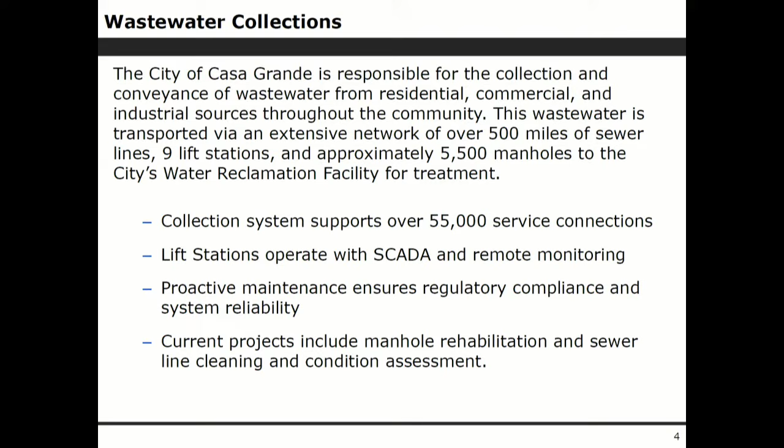Our wastewater treatment plant, as it currently lies, is 18 million gallons a day. We are just completing a conversion. We were at 12 million gallon a day capacity. We're going to be finished in the fourth quarter of this year with our expansion to 18 million gallons a day capacity. And we have a future capacity of over 50 million gallons a day at that location if we choose to continue to treat in a centralized location for Casa Grande. We do have other opportunities, and we evaluate that on an ongoing basis.

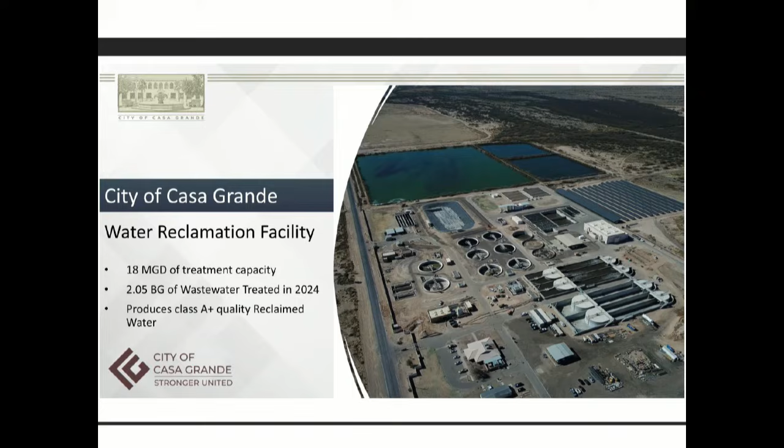In 2024, we treated over 2 billion gallons of waste that came in from our residents and our industrial users. And again, we produce that A-plus quality effluent.

We have 12 certified operators through the Arizona Department of Environmental Quality that work at our plant. 2 of those are grade 4, which is the highest grade that you can get for certifications. And if anybody knows anything about the wastewater industry, finding talented people is very difficult, so we have to really grow from within. So when our maintenance workers come on board, you can see how many of them have their grade 1 certifications, and then 2, and then 3, and then ultimately 4.

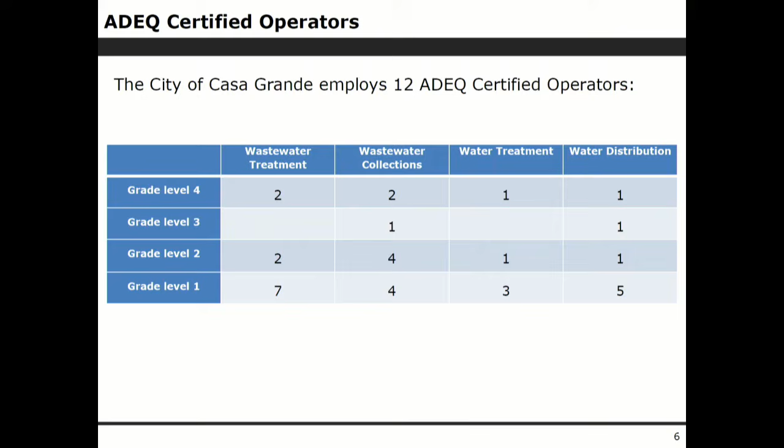So if kids ever thought about what they want to do for a living, if they can get over the stigmatism of wastewater, it's a great place to be able to grow your career very quickly if you can get through that certification program. And when we go out to the schools, we try to promote that as much as we can, but it's difficult to find certified operators. We're very, very fortunate to have the level of operators that we have in Casa Grande.

And then our treatment process. So our preliminary treatment is basically to get any of the difficult debris out of that waste stream. If you have a swimming pool and you picture a rock going into your filter, you can imagine what that's going to do to your impeller. So now you have to imagine all the waste that anybody can send to us, what that can do to our systems that we have in our wastewater treatment plants. So that first thing is to screen that debris out so that we do not have to treat it and it doesn't impact our pumps in a negative way.

And then our secondary treatment is our biological treatment process, and those are our aeration or oxidation ditches. That's where we introduce our microenvironment that we've created, basically our bugs that digest all the nutrients in our waste stream. If you've ever seen our aeration ditches, when I give the tours to the kids or the folks that come out to our wastewater plant, it's like Willy Wonka's chocolate factory river. So that is the process that we do, but that's where the bugs work, and we start to digest that waste and get it to a place where we can then treat it through the rest of the process.

Our next process is our clarifiers, and that's where we separate the liquids from the solids. Effluent is the liquid portion of that waste stream. The solids go in their direction, and I'll talk a little bit about how we process those in just a bit. But then those liquids are what turns into our treated effluent.

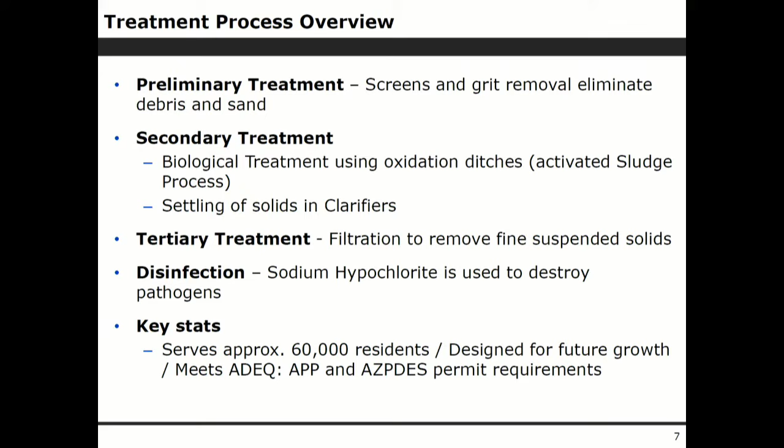Kevin, can I ask a quick question? Absolutely.

How often does the state come and do inspections? Don't they monitor your operation on some kind of a regular basis?

The best way I can answer that is whenever they want. But we do have regularly scheduled inspections where they come out and look at our daily reports and things like that. They can come out anytime they want and take a look at our process, and we encourage them to come out. We like to think we're the flagship of wastewater treatment. I'm sure there are better plants out there in the world, but we do a really good job of maintaining our plant and ensuring that we are right where we need to be for regulatory compliance. Yes, heavily inspected and heavily regulated. Probably too much, but we really don't have that choice.

This diagram just gives a line graph of our different treatment processes. The upper process is the liquids, where we go through that secondary clarifier, which separates those liquids from the solids. We go through that filtration process, then into the chlorination or disinfection basin, then we dechlorinate, and then we discharge. Our solids go through a similar process where we further digest that waste to a point where there's nothing that's going to impact the environment when we get rid of those solids.

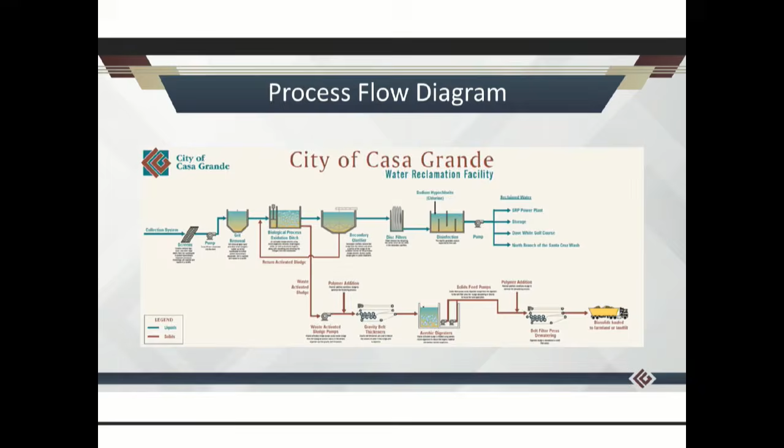Yes, very much so, we introduce air to that system. It helps break it down and get rid of the nutrients that are negatively impactful on the environment. Once we get to a point and we test and meet those requirements, then we're able to use it at our landfill. There are also a lot of other ways you can use that solids material — you can land apply it for fertilizer and things like that, but we currently don't do that. As you said, from a digester, it comes out as just plain dirt that really doesn't have anything. They use it for bedding for the cattle and all this stuff, but it really isn't good for topsoil because everything's been removed from it. Correct, it's pretty inert at that point.

Our Phase 4A expansion, which will be finished in the fourth quarter of this year, cost just over $32 million and takes us from 12 million gallons a day to 18 million gallons a day. We've also expanded our solids handling capability with this step and improved our odor control. Our Phase 4B, which is under design right now, is where we'll be introducing UV disinfection to our process, as well as putting odor control throughout our entire plant. We're really trying to create redundancy in the process and replace some of our older equipment so that we're more modernized and ready for that next growth spurt whenever that happens — but it sure hasn't slowed down lately. We're continuing to grow in Casa Grande.

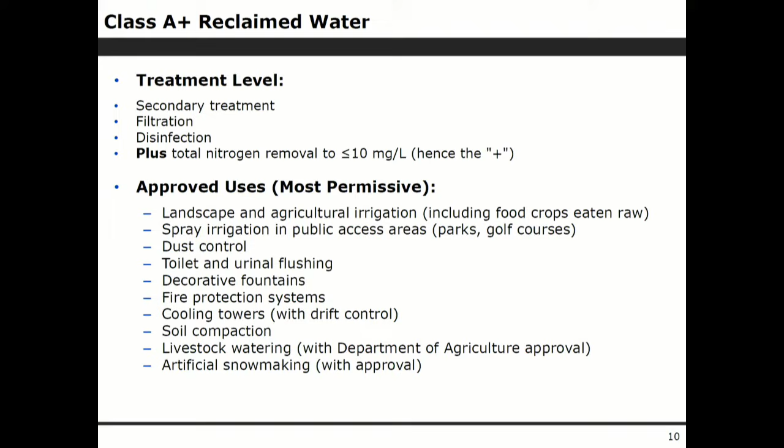We also send it to SRP's Desert Basin power generation plant, where they use it in their cooling towers. Most of our effluent gets discharged to the north branch of the Santa Cruz, which is what's called our managed recharge facility. There are two types of recharge facilities: a managed recharge facility takes advantage of a natural waterway to discharge your effluent into, allowing that to percolate into the ground and receive further beneficial treatment through the ground process.

We have a 5.8 mile long managed facility in the north branch of the Santa Cruz, and I'll show you a picture of that here in just a second.

We're able to recharge 3,500 acre-feet of water each year, but we don't achieve that today because anytime it rains and water is introduced into that system, we get zero credit for what we discharge. Anytime we have a monsoon, or in some cases the San Carlos Irrigation District has points along their distribution system where they discharge water into the north branch of the Santa Cruz, we get zero credit for that. So we have the capability of recharging 3,500 acre-feet, but we don't achieve it because of other influences.

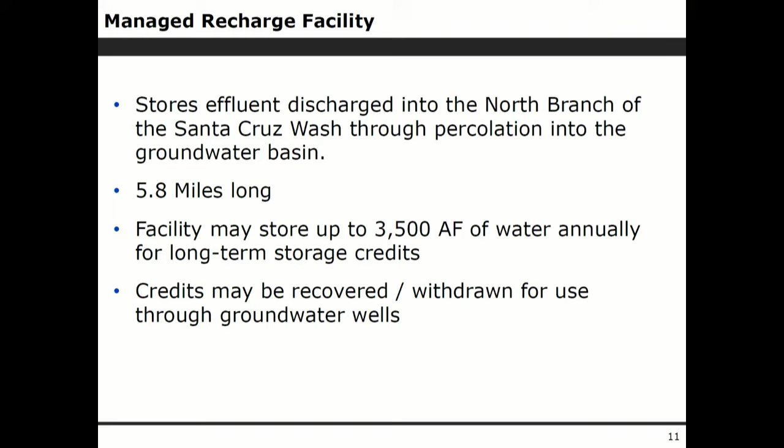Yeah, sure, go ahead. I'm sorry, Kevin.

When you backed up two slides, you're saying where you pump it to the golf course, to the toilets, to all this, so you have to have a separate line running into those places. I'm looking at fire protection systems. My home is covered, I have fire sprinklers in my house, which flooded one day - it was real fun, but a whole other problem. But that comes just from the main line.

So how do you, if you had fire protection systems in, say, industrial parks, would you have a separate line running to that industrial park? So then would building code in the city have the provision to say this industrial park or this area has to have a separate line for effluent water to service all these areas?

Yeah, I think it's commonly called purple pipe. We don't have it as a city code, but we have the system in place.

We just finished about an 8-mile long effluent delivery line into our industrial area. It's also an opportunity for us to have an alternative discharge point in the main branch of the Santa Cruz, but that line was developed to deliver effluent to our industrial users, and it is in place today.

We're currently upgrading our effluent pumps to feed that system, and we're negotiating with some of our industries so they can take advantage of using that treated effluent for cooling towers, fire protection, or any other permitted use. That way it doesn't impact the potable water use of those industries and really helps with the drinking water situation in our area.

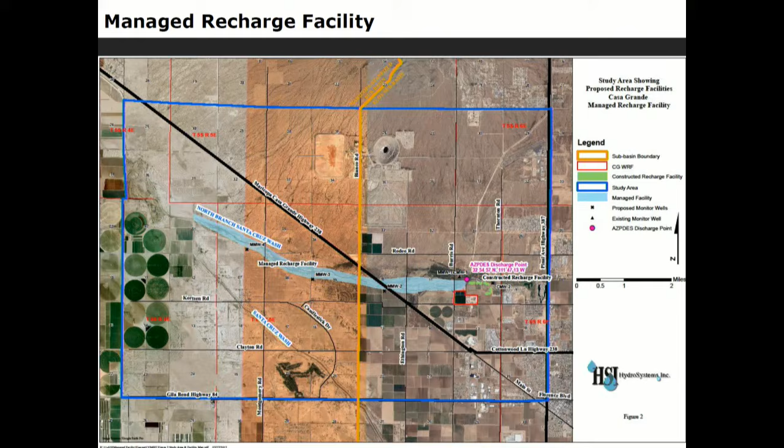Soil aquifer treatment is basically what happens when it rains, or when we discharge our effluent, or any water hits the ground. That water is absorbed and goes through a beneficial treatment by the natural environment. Even though we've treated our effluent to a point safe to discharge, as it percolates through that system, it gets cleaner as it goes deeper through the ground. That's how it's worked forever, and that's how it's going to continue to work.

But we take great pride in meeting our permit requirements. We don't have to treat to an A+ standard. We do that for a reason, because we want to take advantage of every drop of water, especially here in Arizona where water is gold, and it is the future, and we need to maintain that resource.

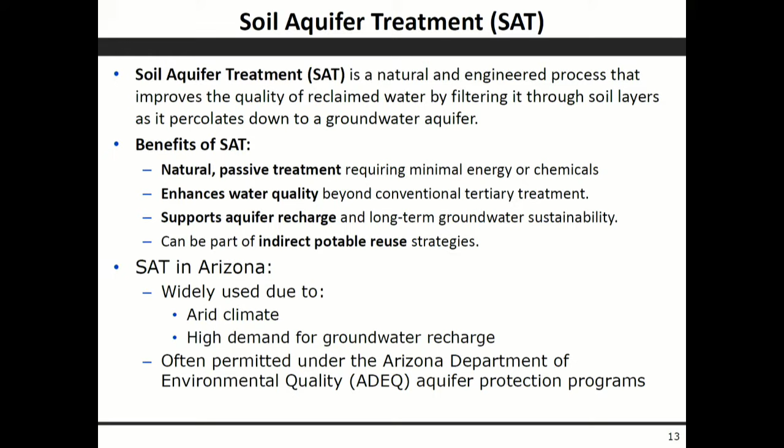So that's the end of my presentation. Happy to answer any additional questions. Any questions for Kevin? Steve.

Yes, Jeff. On one of your charts there, and the purpose of this whole meeting is to put people at ease, it said it could be used for watering livestock with USDA approval. Explain how that would happen, because I know with effluent that goes into like an urban lake, is it really safe, but it's safe for animals?

Yeah, and actually the one up there includes irrigating food crops that can be eaten raw. So each of those reuses have to be permitted, and each one is reviewed. So if a farmer wanted to use that for agricultural use, we would go through a permit process to get that approved. They would have to have a permit, we have to have a permit to deliver. So it's all looked at every time we make any changes to how we use that effluent.

So if you have a backyard garden and you have heads of lettuce and you spray it on the lettuce, it would technically be safe to eat still.

Yeah, I'm not going to sit up here and drink a glass of treated effluent just because I know how great Arizona Water treats their water. I would prefer to drink theirs than that, but it is totally safe.

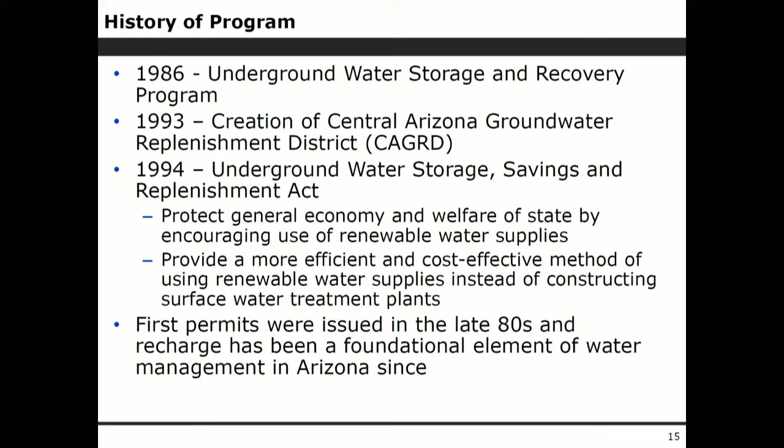Before I talk too much about the program, I just want to give you a feel for the complicated nature of groundwater in Pinal County. Some people think of Pinal County as being entirely encompassed within the Pinal AMA, but that is not the case.

The state of Arizona is divided into 50 groundwater basins. Some are called active management areas because that's where we have higher levels of regulation, and outside those AMAs there are lower levels of regulation. As you can see from this slide, there are 3 active management areas inside Pinal County, and there are areas outside those active management areas.

Arizona Water Company serves 3 primary water systems within Pinal County. There's what we call the Superstition system, which includes Apache Junction, Gold Canyon, and Superior. Down in the southeast, we have our Falcon Valley water system, which includes Saddlebrook Ranch, Oracle, and San Manuel.

And then what we consider to be our primary and largest water system is the Pinal Valley water system. That includes a number of water systems within it, and it serves the Stanfield area, Arizona City, Casa Grande, and Coolidge. So it might look easy to understand at the moment, but if we go to the next slide, this is actually a picture of those groundwater basins themselves.

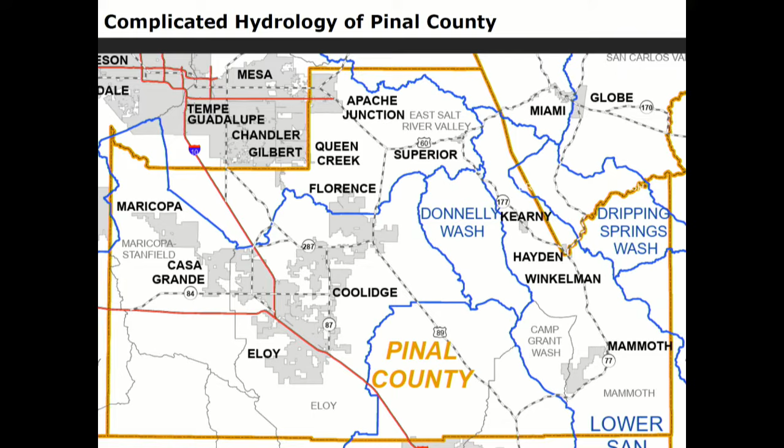In addition to the active management areas, there are several smaller basins outside the active management areas located in Pinal, including Donnelly Wash, the Lower San Pedro, Dripping Springs, and also the Salt River. So there are 7 groundwater basins within Pinal County, which makes for a more interesting water management picture.

But let's talk about what groundwater recharge is. Groundwater recharge refers to the replenishment—using that in the more common sense, not as in replenishment done by the CAGRD—but as the replenishment of a groundwater aquifer through natural, incidental, or artificial means. Natural is when it rains or snows, and that water percolates into the ground, finds its way to rivers and streams, and ultimately to the aquifer. That's natural recharge, it happens every day. Kevin was referring to that in his presentation.

Incidental recharge is when a water user, like a municipal, industrial, or agricultural user, uses water and a portion of that water goes unused and finds its way to the aquifer. An example might be growing crops: you apply a water supply, some of that water is used consumptively by the crops, but the remainder goes to the aquifer.

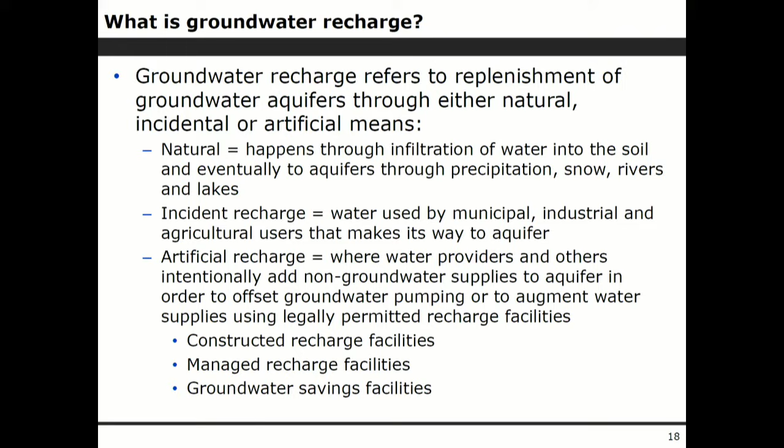The final way to replenish the aquifer is through artificial recharge, where a water provider or others intentionally add a non-groundwater supply to the aquifer in order to offset groundwater pumping and augment water supplies for the future. They do that through legally permitted recharge facilities. Kevin mentioned that the city of Casa Grande has a managed recharge facility, which is one type of facility, and I'm going to talk more about some of those in a minute.

But let's talk about replenishment for a minute. Replenishment is the function of replacing groundwater pumping considered to be in excess of sustainable levels. It is conducted through artificial recharge facilities that are legally permitted—again, the same facilities, and we'll talk about those shortly.

The difference between replenishment and recharge is that replenishment happens after the groundwater pumping has occurred. The other difference is that the responsibility of replenishment currently lies solely with the Central Arizona Groundwater Replenishment District—no other entity has that responsibility. Everyone else would be recharging it, which is something you'd do in advance of recovering those credits.

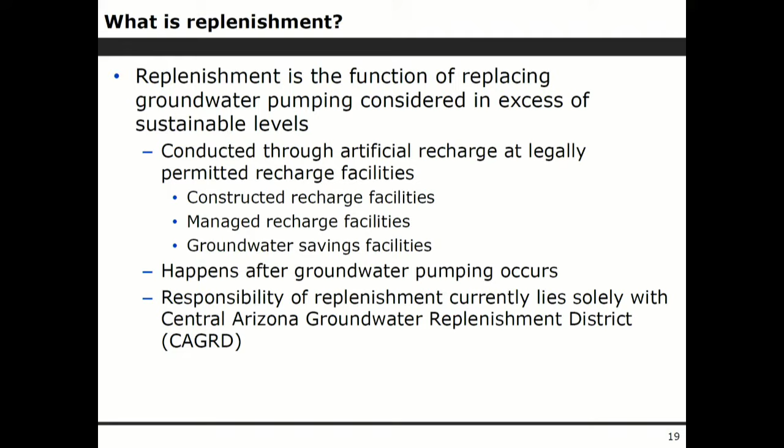The legal sources of water for recharge or for replenishment. Basically, it's any water supply that is not a groundwater supply. In Arizona, we're typically looking at Central Arizona Project water, CAP water, Colorado River water, surface water like Gila River water or water from Queen Creek, and effluent.

Effluent is the only supply that requires an aquifer protection permit, which is an additional level of regulation that Kevin referred to. On the right, you can see two constructed recharge facilities, both located inside Pinal County. One is the Superstition Mountains Recharge Project, located in the Phoenix Active Management Area, owned and operated by CAP. The one below is the Pinal Valley Recharge and Recovery Project, located in the Pinal AMA, owned and operated by Arizona Water Company.

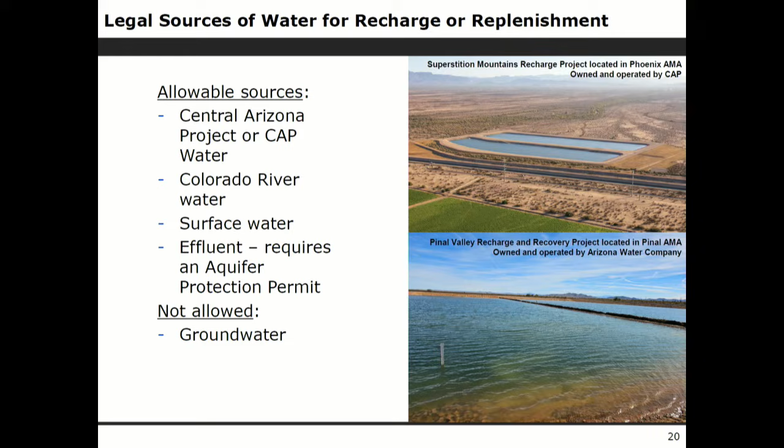So let's talk about the different types of permits. I mentioned earlier that the program was revamped in 1994. When that was done, all of these different permits were created, so you cannot operate a recharge project in Arizona without these permits in place. You need an underground storage facility permit, or a groundwater savings facility permit, depending on the type of facility you want to operate. So you have to have a facility permit.

There are two types of underground storage facility permits, a constructed facility and a managed facility. Casa Grande's facility is a managed facility. Of the 12 constructed facilities in the Pinal AMA, 2 store CAP water and 10 store effluent. Of the managed facilities, there are 3 in the Pinal AMA, 1 stores CAP water, and 2 store effluent. There are also groundwater savings facility permits, and I'll talk more about how those processes work in a moment. There are 4 in the Pinal AMA, 3 store CAP water, and 1 stores effluent.

Anyone can store water at a legally permitted storage facility in Arizona, but they are required to acquire a water storage permit. Whether or not you own the facility is irrelevant—even if you own the facility, you have to have a water storage permit. There are 50 such permits in the Pinal AMA, and whether you're going to store or recover that water in a single year, or store it long term for future shortage, you still have to have that permit.

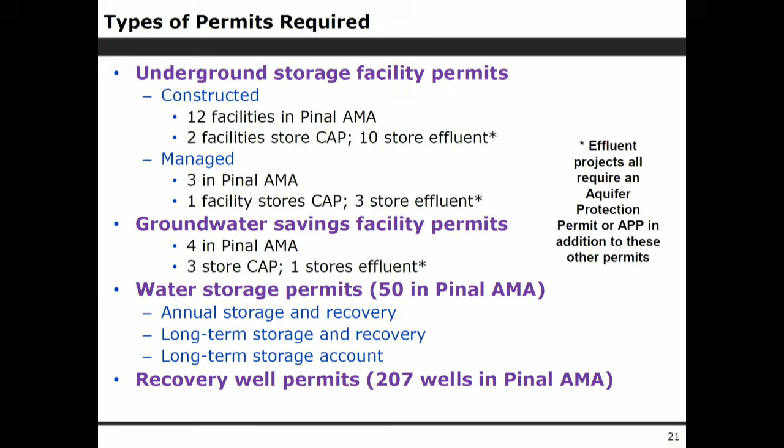Real quick question, Ms. Chair. So we were talking about the two projects—one was holding water, the two ponds you were showing on the side, those recharge ponds. How do they recharge? Is that percolation? Yes, these just percolate.

So what happens is, and by the way, I wanted to mention I brought my recharge hydrologist with me, Mr. Dick Thompson, and this is his encore career. He is our recharge hydrologist. He spent most of his time with the city of Tucson operating their recharge program, which is quite extensive. So those are, I'm sorry to back up on you like this, but they're pretty large projects. How long does it take that water to get there—how deep is the water table?

How long does it take the water to get there? How long does it take those ponds—how often are they recharged? Are you maintaining a constant level? Are you having to pump it? I'm just curious, because of evaporation and the fact that it doesn't really go too far into the ground.

Yeah, so it depends on the facility. Since we have direct knowledge of the Pinal Valley Recharge and Recovery Facility, I would ask Dick to come up and give a brief answer, because he keeps track of this all the time, so he knows exactly how long it takes to get to the surface. I'm just curious. Thank you—I went to the ribbon cutting of that facility the day they turned water into it the first time. Anyway, cool. Go ahead.

So I'm curious, since this is a recharge pond - it's percolating at a certain rate, the water level goes down, and some more water comes in. How do you balance that? Maybe that's kind of an open question.

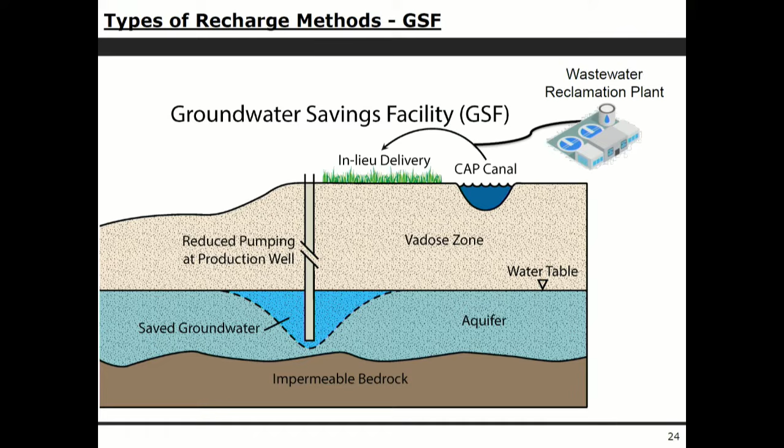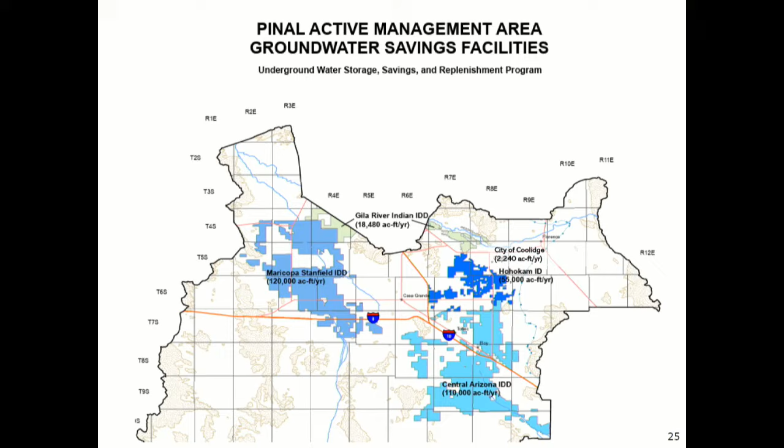This is the location of the groundwater savings facilities in the Pinal AMA. I'll just add that no one type of facility is better than another - these are just two different methods, and depending on your situation, one facility might work better, or a combination of facilities. Let's talk for a few minutes about how much this tool is being used. I mentioned back in the 80s and 90s when we passed that program - we've been storing water in the ground for a long time.

This graphic represents all the water that's been stored in the active management areas since the inception of the program. That's 13.36 million acre feet, over 4 trillion gallons. To give you perspective, Arizona Water Company today uses about 20,000 acre feet a year of water. This would be a supply that would last us 668 years.

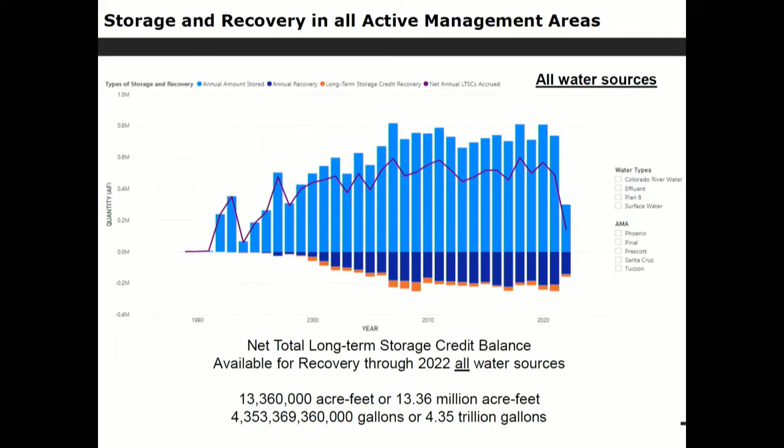Now let's take a look at effluent. Again, this is all effluent that's been stored in all of the active management areas since the inception of the program. 1.45 million acre feet of effluent has been stored, that's about 472 billion gallons. That is roughly 11% of all the water that's been stored since the inception of the program, and that's in all the AMAs.

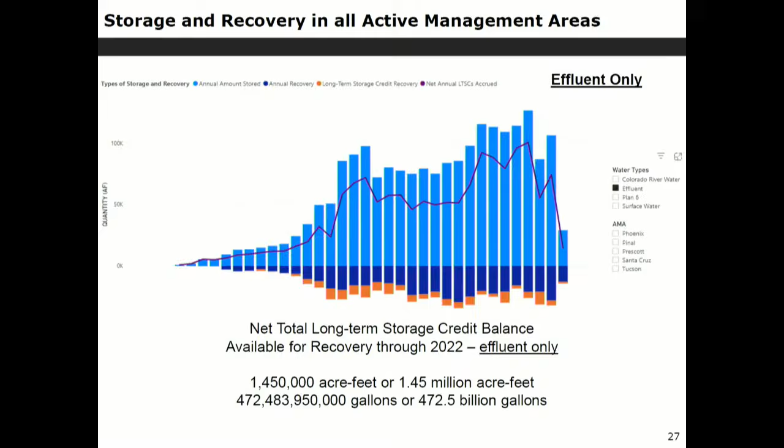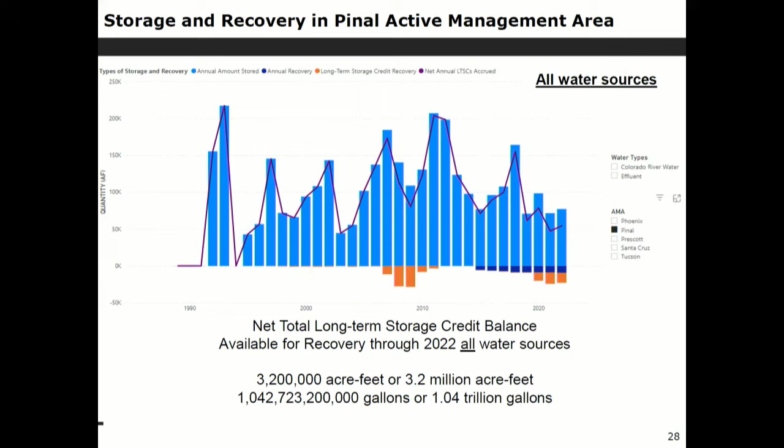Now let's take a quick look at what's going on in Pinal. By the way, this data is through 2022, so 2023 and 2024 are not included. In the Pinal AMA, of all the water sources, there's been about 3.2 million acre feet of water stored. That's about 1 trillion gallons, and that's all water sources. Of effluent, there's been about 27,350 acre feet, or 8.9 billion gallons. That is not even 1% of the total water that's been stored in the Pinal AMA. So storage in the Pinal AMA has by far been through CAP water.

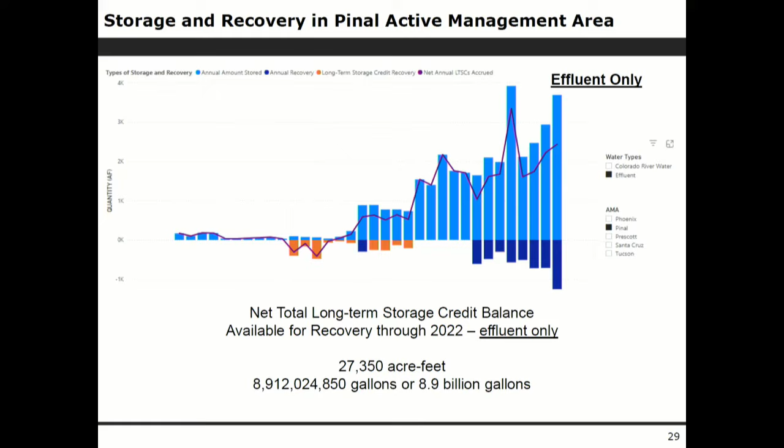So let me talk a little bit about our recharge program. We consider recharge to be an extremely important part of our water management strategy. We are currently storing at 3 groundwater savings facilities. We've been doing this since 2015, and those facilities are those 3 irrigation districts we're all familiar with. We own and operate the Pinal Valley Recharge and Recovery Facility. We've been operating it since 2020, and Mr. Thompson is our recharge hydrologist, and he's very good at what he does.

Going forward, if we become a sewer provider in the Pinal AMA, we will absolutely include effluent storage and recovery. We own and operate 24 recovery wells that we use to pull that water out of the ground each year.

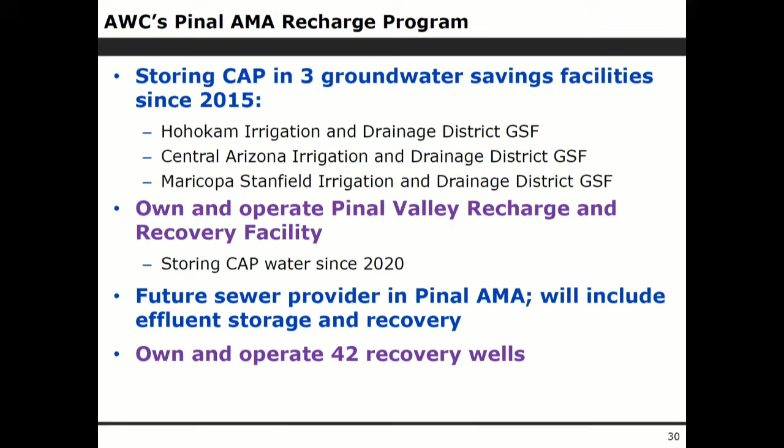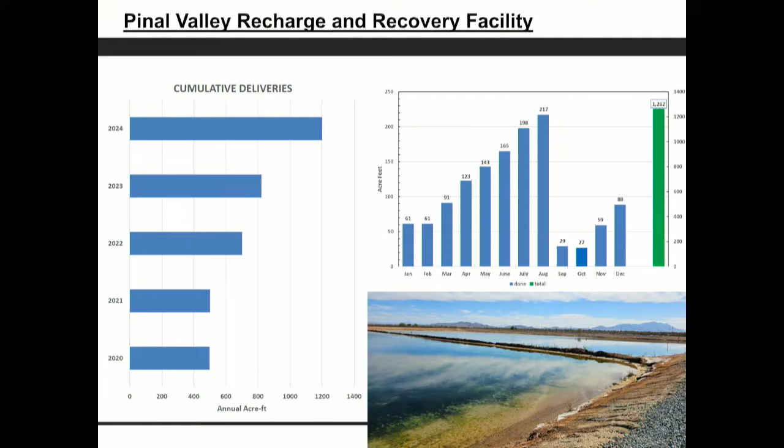Last, I want to talk about our water resource strategy and how some of this stuff all fits together. At Arizona Water Company, we have two water resource strategies: one is to secure and maintain a diverse water supply portfolio, and two is to promote the efficient use of all the water supplies that we have. I'm going to start with the second one first because I'll talk more in depth about the first one.

When I say we promote the efficient use of all water supplies, I mean every single person, every single entity, including Arizona Water Company, the city, the county, we all are going to use our water efficiently. It doesn't matter whether the customer arrived 100 years ago or isn't going to arrive here for 10 years. Anybody who lives here is going to use their water supply efficiently, and it doesn't matter the type of use—a golf course, a home, a cow, landscape watering, Lucid Motors, or the Wendy's. Everyone is going to use water efficiently.

And it doesn't matter the supply source. We don't care if it's CAP water, effluent, or groundwater—in fact, those supplies are all commingled together. We live in a desert, so we're going to use every drop of water we have as efficiently as possible. That's one piece of it. We also look at water efficiency as a type of water supply: if we use our water efficiently, then we will not have to go out and acquire as much water as we would otherwise have to.

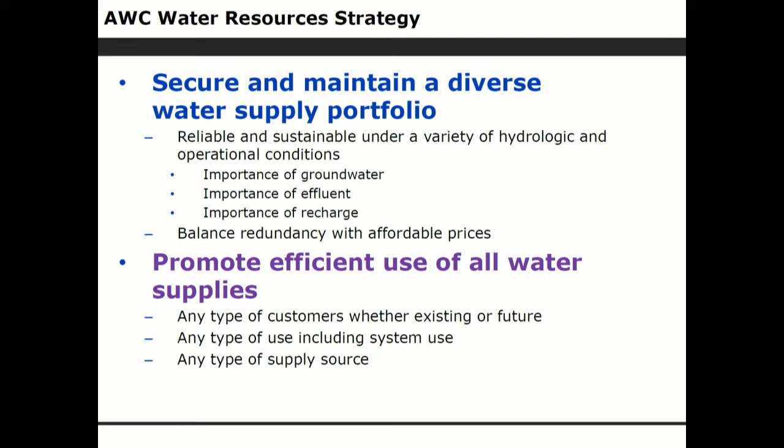One day I hope to have Social Security, and that's going to come in every single month—that's like a renewable water supply. Maybe I have an annuity somewhere, maybe a pension—those are going to come in on a monthly basis.

I need to manage my groundwater supply, I need to manage my 401k to last throughout my life. I do that by using my renewable supplies, and then maybe I go out and get a job and recharge my account, put a little more money in it—maybe get a part-time gig, something like that.

If you look at the way you manage your water portfolio, that's essentially the same way we manage our water supply. I'm going to stop there, because my job is to pass the mantle off to David Dunaway, who's going to describe, once the water's recovered, what he does to make sure it meets drinking water standards.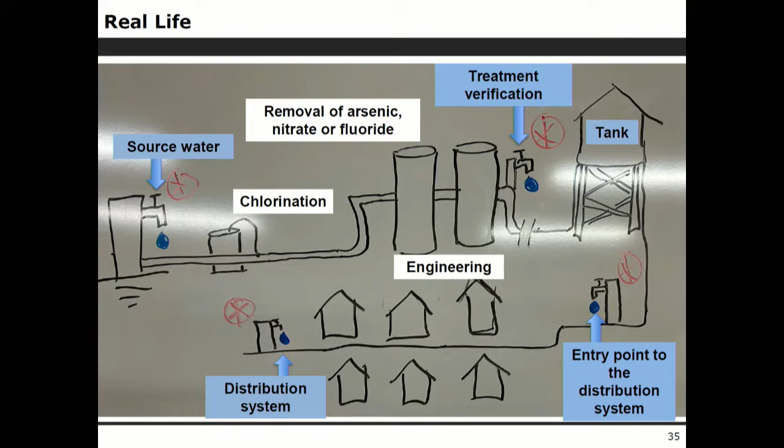Once every 3 years, the friendly folks at ADEQ do pay us a visit. I can echo Kevin's sentiment that they show up as frequently as they like, but no less than once every 3 years.

And when I was talking about sampling in a number of locations, oh boy, there's a lot of sampling. The state and federal government in the Pinal Valley system every year would like us to take 938 samples, and that's a lot just by itself. But we don't stop there. At Arizona Water Company, we're taking over 3 times the number of operational samples that we hold ourselves to, to make sure that we are serving safe drinking water above and beyond what the government wants us to.

And in a case, as you can see, where there's a 0 for treatment verification and a 0 for tank samples, despite thousands of pages of regulation, we're taking samples in places the government didn't really ask us to, just to make sure the water is safe and we understand it from start to finish.

Before I started at Arizona Water Company, and what sold me on working here, despite a claim of job hopping, was it was described as compliance is not an option. It's a drop-dead requirement. As a former regulator, somebody who's worked in water a long time, that was music to my ears. After decades of working in water and public health, like I was saying, there's just compliance down here, and then there's where we are.

Now, these water samples are sent to state-certified labs, again, with their own body of regulation. We are very lucky in Arizona to have really good ones here. But even then, for a handful of the really complicated tests with stuff I don't want to pronounce in a public venue, we have to ship those samples out to California and Ohio because there are so few specialized equipment needed to detect down to these super, super tiny levels that we need to for compliance or above compliance in our case.

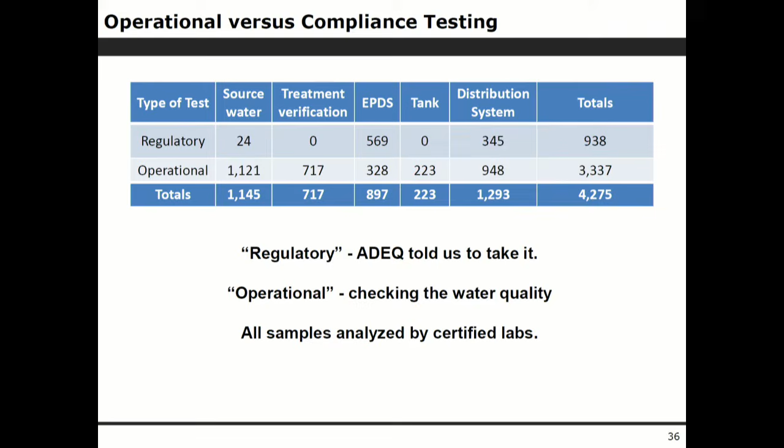But who takes those samples and who runs those plants? Trained and certified experts. Out of 295 Arizona Water employees overall, all of our systems, our support staff, just about half of us, 135, hold at least one level of certification. 34 of us in Pinal Valley are certified operators, again, about half of our 70-plus staff.

Now, in drinking water, there's 2 kinds of certified operators. You hold one license to operate the treatment plants, and you hold another license to operate the distribution systems. There's 4 grades in each class. The first one is the first step. Grade 4 is the pinnacle of your career. And so the table there gives the breakdown of certified operators and their level, both for Arizona Water Company and Pinal Valley. Something very interesting, you tend to have the most either at the begin or the end of your career. We've got the most first level grades or the 4th level grades. Folks tend to stay at Arizona Water Company a long time and progress through their career. So you'll see a distribution where you've got more at either end. The data nerd in me really enjoys that.

Legally speaking, though, you technically only need 2 certified operators, one that holds certifications at the grade of your water system and your distribution system, and one more as a backup. We have many, many more than that.

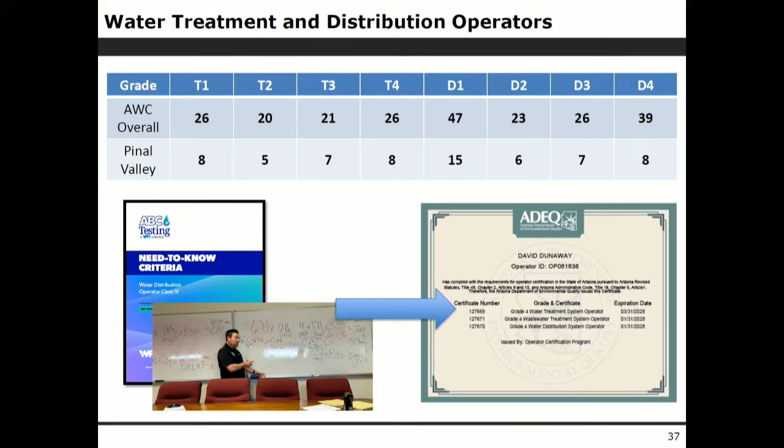Why do we need this level of expertise? As you can see on the screen, water is so much more complicated than just turning on a tap. The top photo is one of Pinal Valley's nitrate removal plants north of Mission Royale. Kind of hard to make out, but each one of those 5 treatment vessels has a myriad of valves, actuators, electrical panels, ways of bringing water in, taking water out, putting it to backwash, putting it for disposal. And that's a lot of stuff that people have to keep track of.

More of a zoomed-in photo on the bottom is a pilot test we recently conducted in Coolidge to better remove fluoride. Despite being in a Connex box and about 130 degrees, there's over a dozen input panels, 9 sampling ports, multiple chemical pumps, and 1 very loud air relief valve. Simply stated, treating and delivering safe water so that our customers can turn on the tap is a very detailed and complex process.

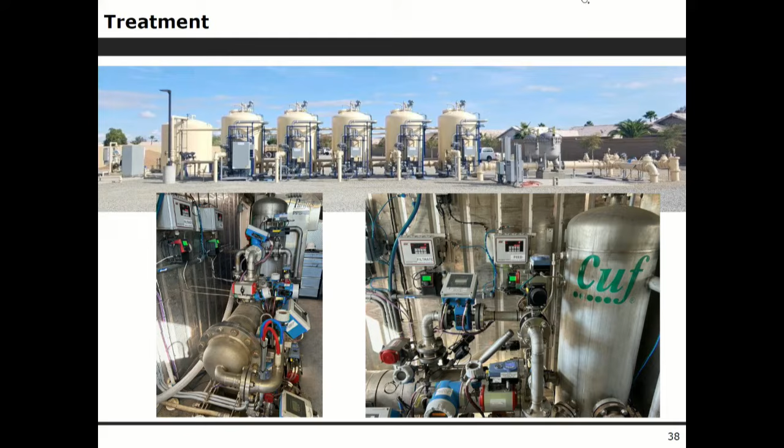But I encourage you not to just take my word for it. All water systems are required to publish a consumer confidence report each year where they document the water quality and the sample results. So I encourage everyone to visit our website, www.azwater.com. The header at the top, look for water quality. Very first on the link there, consumer confidence reports. We are just about to put up 2024's water reports here in the next couple of weeks.

Final thought, on a personal level, I live in Casa Grande within our water system. My kids drink the water. I drink the water. I took this job here in Casa Grande because I believed in the people and I believed in the company. So I am just one resident of Casa Grande, but I believe in what we do. And I put it to the test every day. I'm not going to jeopardize my family. And the same is true for the rest of our leadership team.

So thank you very much for the opportunity to present. I think that wraps everything up. I'm happy to take questions or bring up the appropriate person. Any questions?

Mr. Surtee, you think we covered it? I think over-covered it, actually. Yeah, that's okay. No, seriously though,

I want everybody to understand how regulated the water systems are, how much regulation goes into supplying water to the residents of Arizona overall. We're fortunate enough to have probably some of the top operators in our county here, but it's not what was depicted on Facebook at all. It's not even close to that. So I want everybody to understand we really do put a lot of effort into ensuring our water supply is safe for all Arizonans.

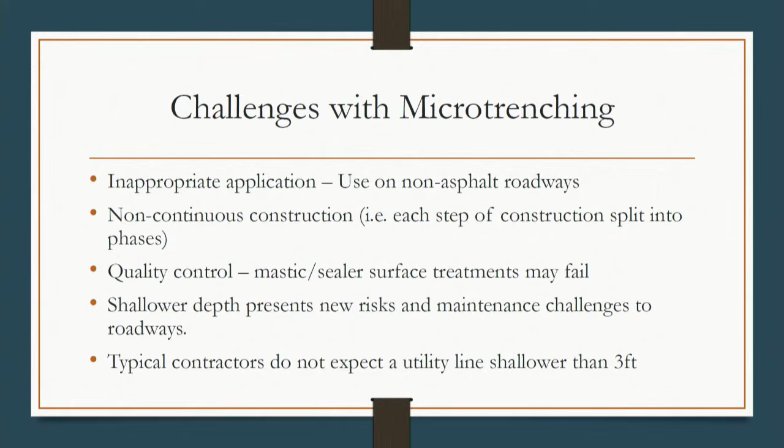So one thing I want to talk about is the impact of pavement cuts. When we talk about microtrenching, we're talking about cutting into the pavement section, placing a fiber conduit within that roadway section, and then backfilling it.

Every time we make a pavement cut, it introduces a weakness or a weak point into the roadway, which is an area where we could have structural failure, water infiltration, surface degradation, and other types of issues. Over time, if it's not done properly, we could have increased maintenance burden and increased costs.

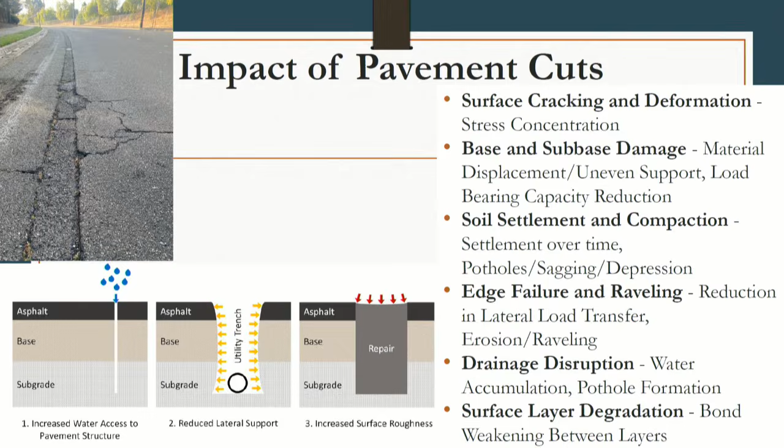Mr. Chair, quick question. Yeah, sure.

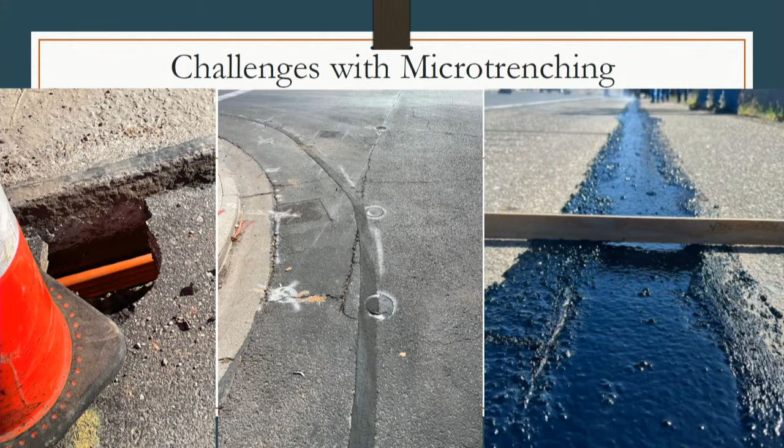Mr. Wanamaker, on the picture on the right, is that because when they put the, lack of a better word, spackle in the hole to fill it, they didn't put enough in and let it settle long enough before they come back and fix it before they put the mastic on? Is that it? Yeah, that's potentially what happened there. Or when they backfill with a slurry, they didn't fill it up high enough, and so that gap was too much. That mastic sealer is very liquidy, it's basically surface, like a crack seal. So the problem is we'd have to regulate how well they fill it before they put essentially the crack seal on top of it. Right, exactly. Thank you.

So here's some more photos showing some of the challenges and problems that may come up when we talk about microtrenching. On the left, we've got some surface that's worn away, creating a very rough surface. It can also create problems with capturing your tires. It looks bad too.

There in the middle, we have a very thin asphalt section, and you've got the asphalt chipping off, so that's going to require a pretty substantial repair. That may have been a roadway where microtrenching would not have been appropriate. On the right, we also have that slurry backfill that wasn't put in to a high enough level.

So now you've got a visible subsurface roadway surface there. With that said, there are some advantages to microtrenching, and this is where we want to consider the good things that come with this.

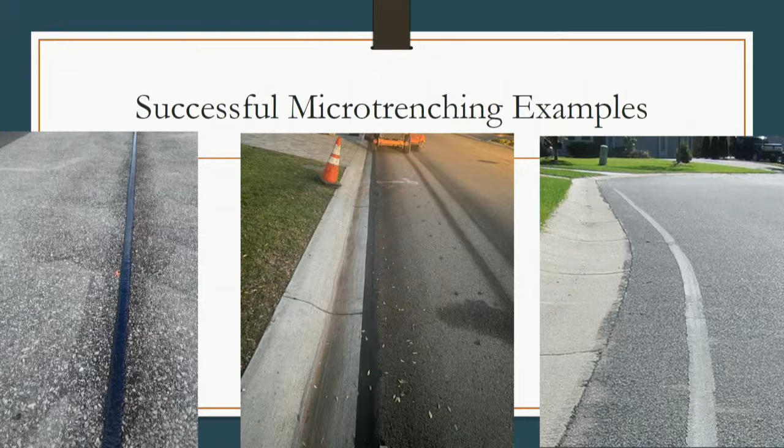Well, just moving along here, I wanted to show a couple photos of some successful installations. On the left, it's a very clean, straight line, flush with the surface, so that was a successful installation. In the middle, you can barely see it, but it's there along the curb line, essentially just looks like a darkened area. They did a good job keeping it straight, flush, clean, and it should be a good quality job. Then on the right, we've got one that's offset from the curb line, also flush. So that was another good one.

So let's talk about standards. I mentioned earlier not many other agencies have microtrenching standards. City of Mesa has the most comprehensive standard out there. It's being used by many companies for installation, obviously in City of Mesa, but I believe it's also being used in other jurisdictions who've just adopted it by proxy. Town of Gilbert has a draft, but I don't think they've adopted it yet. City of Scottsdale had one, and then I believe they repealed it or let it expire because, to my knowledge, nobody actually used it.

ADOT has a standard that they've used on some projects. It's not an adopted standard, but it's something they've approved for some specific uses. I also want to mention Maricopa County—they are planning, at least according to the people I talked to, to adopt something this year, but I don't know what that is, I haven't seen it. And then MAG, Maricopa Association of Governments, convened a technical working group in March of this year to discuss this very topic, with a lot of good feedback from agencies there, which I'll talk about a little later. It would be good to have a MAG standard everyone could use, but their timeline is much longer than ours, so we need to get something done sooner.

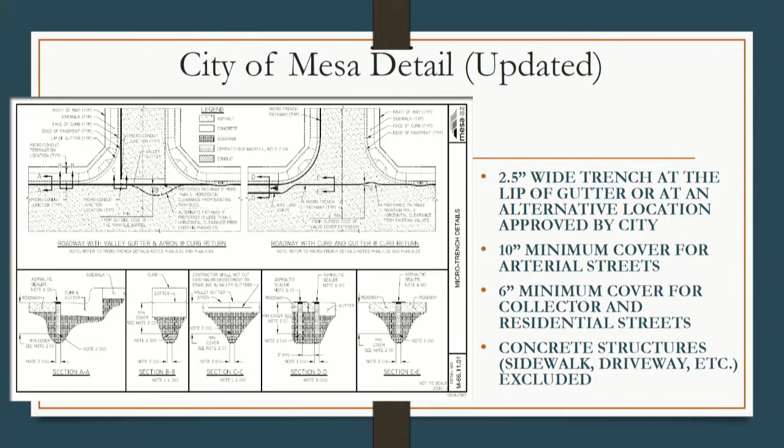So, just real quick looking at the standards, here's a screenshot from the City of Mesa detail. One thing to point out: they allow a maximum 2.5-inch wide trench, 10 inches of cover on arterial streets, and 6 inches on local and collector streets—pretty shallow. They avoid any concrete, so if there's concrete, they've got to go around or under it; you're not supposed to cut the concrete. They also have provisions to address bike lanes—you can see in that detail, if there is a bike lane, they have to go to the left of it. There are actually several sheets, I just wanted to show one of them.

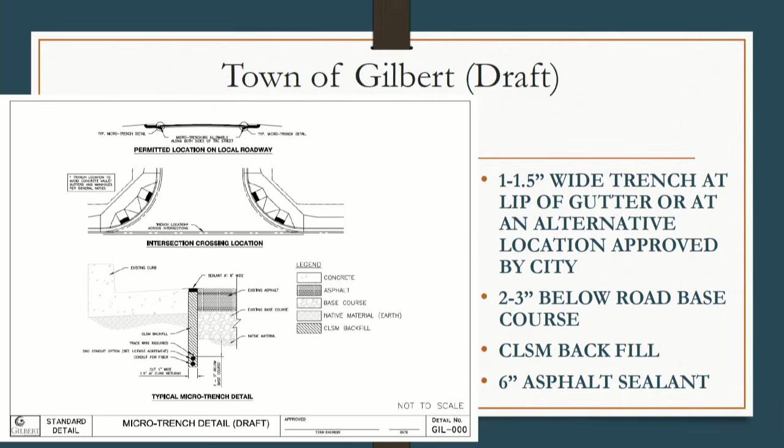So as you'll see later, the standard that we're proposing is very similar to this.

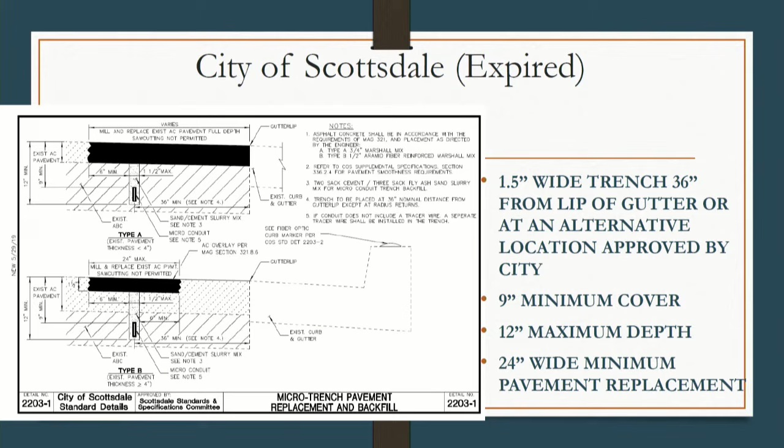Can you mill that with a narrow milling machine? I mean, I see the millers go down the road, they're 10 or 11 feet wide. So do you have some micro miller here? Yeah, they have specialized machines that can do that. This is a typical MAG-type patch where if you're replacing a section with a trench, you're supposed to replace with asphalt at typically 24 inches wide.

So then my next question is, that would be much more expensive than just coming back and doing the slurry on top. Yes, and this is some of the feedback that I'll talk about later that we received from the industry. As we proposed this, they said, hey, this is very expensive, it may be cost prohibitive, it may mean that we will just do traditional instead. So that's some of the feedback.

So with that said, some of the things we're considering with our standards is allowing only one microtrench on each side of the road. We don't want to see our roads cut up all over the place, just one per side. We prefer that if there's curb and gutter, it be between 6 and 18 inches away from that gutter line, and that's to allow for that T-top to be placed.

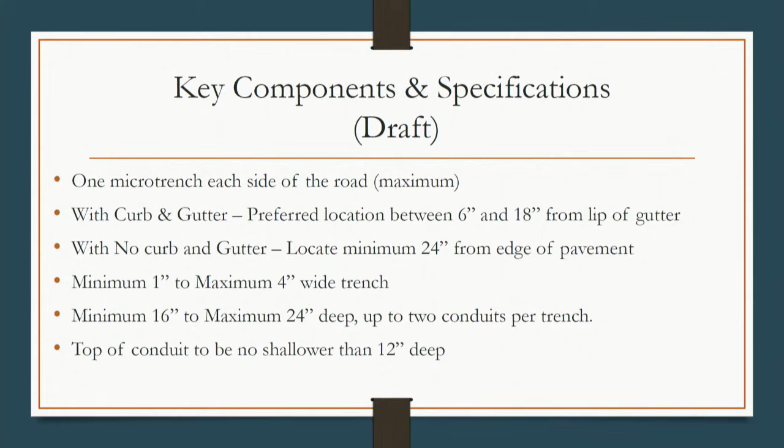Minimum 1 inch wide up to 4 inches wide for that trench. 16 inches deep is the minimum, because we want it below the roadway structural section, with the top of that conduit to be 12 inches deep. Some additional things: slurry backfill, want to make sure it's structurally capable of supporting traffic loads and also the lateral loads of the pavement on either side of that trench so it doesn't collapse inward. And then again, covering with that MAG asphalt T-top.

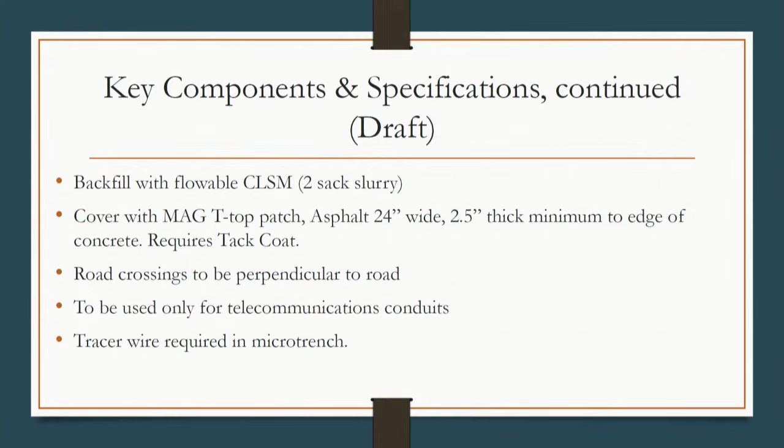Any road crossings need to be perpendicular, and this microtrench should be used for telecommunications fiber only. We don't want to see people putting water lines there or anything else, and we'll want to have tracer wire. Also, avoid manholes, survey monuments, water valves, or anything else. Avoid placement in the wheel path, avoid conflicts with roadway striping. Service laterals should be placed under concrete, curb gutter, and sidewalk. Intersection crossings require traditional methods.

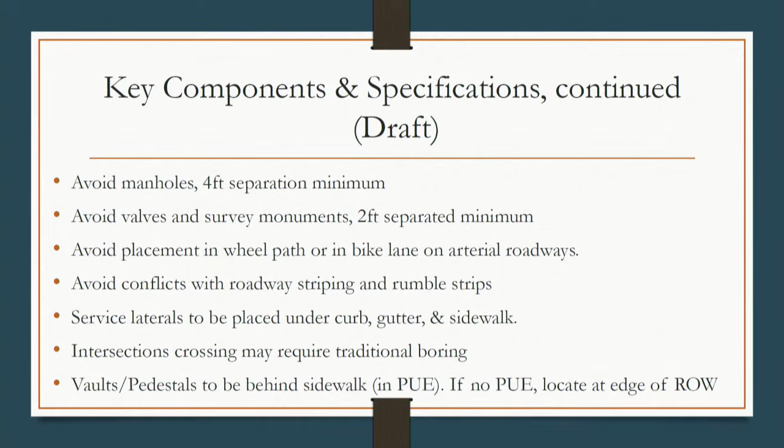So that's what we were bringing up earlier. Any vaults, pedestals, or anything else need to be behind the sidewalk, in the public utility easement. We don't want that in the roadway, obviously. And if there is no public utility easement, it needs to be at the farthest edge of the right-of-way.

So here's just a draft detail of everything I just said. We talk about that 24-inch wide T-top, we've got our trench there, and this does allow for up to 2 conduits. So someone could put one in, they could maybe work with another company to put a second one in, or they could have a backup or whatever. It's just an option, not sure logistically how that would work, but we wanted to make sure we made that available. And again, we want to keep the depth below that structural section of the roadway.

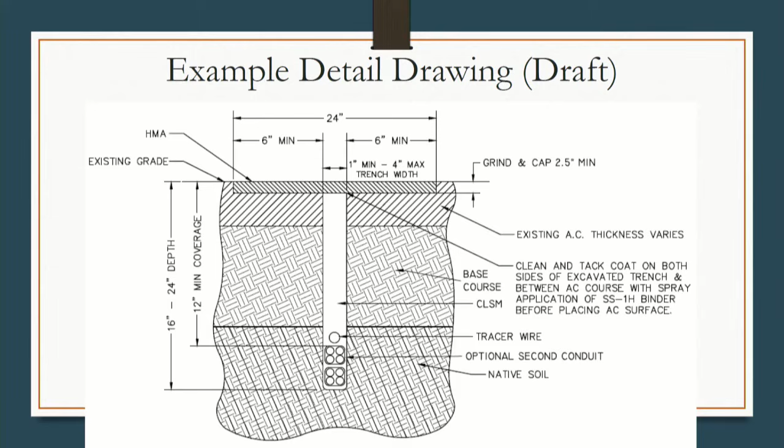So, moving on. Some additional things.

Public notification is extremely important. When a fiber company comes in and wants to put in this infrastructure, we're going to require them to notify the public. There's going to have to be signage, door hangers, social media, and everything else. We want to make sure the public is well informed of what is going to happen within their neighborhood and when it's going to happen.

As far as our permitting goes, we want to make sure construction is done in one continuous operation, no phased construction. They can't come in and trench today, then next week run the conduit, then a week later backfill. We want it done as a continuous operation.

Logical sizes for permits, like one neighborhood or one area at a time. We don't want thousands of permits, but we also don't want one permit for 100,000 linear feet.

And then night work, that's another thing we want. It says here we may require it on arterial roads. We may change that to will require it on arterial roads, but that's further discussion. I don't know if you guys have any feedback on that. Night work obviously costs more, but it's less disruptive to the public.

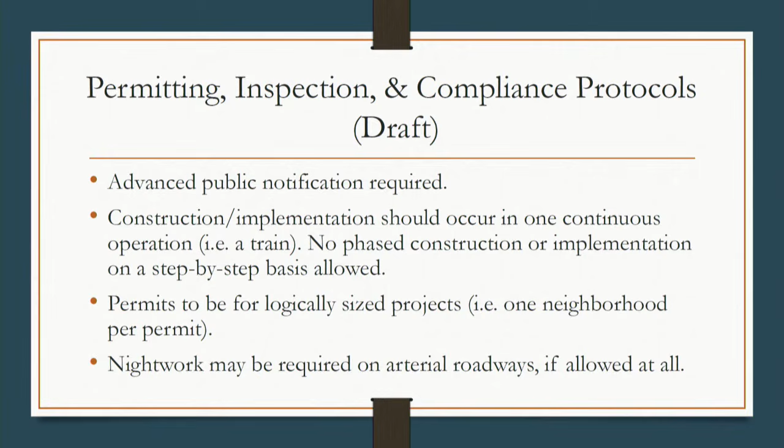Now, to the question that was asked earlier - when we start working with these companies, as we do now, we try to coordinate that work with any work we are also doing ourselves, and work of other companies, other developers, or whatever. We want to make sure disruption to the public is minimized and that we do things as logically as possible.

Some additional things we're still working out when it comes to these standards: again, all other alternatives must be considered first. I want to make sure that if there's nothing in the PUE and it's available, go ahead and use that first.

Another thing is multiple users. We have to be careful about exclusivity. So although we are proposing allowing only one trench per side of the road, that doesn't prevent future providers from coming in and using traditional methods for installing their own.

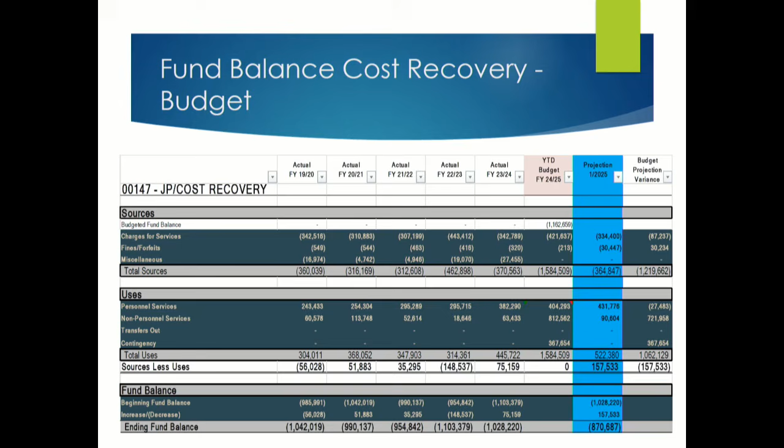Under that, there's a $90,000 amount, mainly the Copper Corridor, updating their communication systems within the courtroom in regards to all the equipment in there, so they're able to do not only virtual hearings with the jail, making sure those run smoothly, but also any litigants out of the area can appear remotely as well. That total is $522,000 this year. We only brought in total with interest $364,000.

So you see at the bottom there, we're starting the next fiscal year at $870,000, which is a good sum. But if we continue on that trend, it's going to be a depleted amount, and those security costs are going to come back in terms of the general fund rather than the special revenue account.

So our request is to raise it to $40. The non-sufficient fund fee, leave it the same - we don't have a lot of that, we don't accept checks from individuals.

This would be adopted at a subsequent public hearing or meeting from the Board of Supervisors. We require a 15-day notice period, so if the board gave direction to move forward with this, we would give public notice and publication for 15 days, and hopefully be back in July before the board to have that vote.